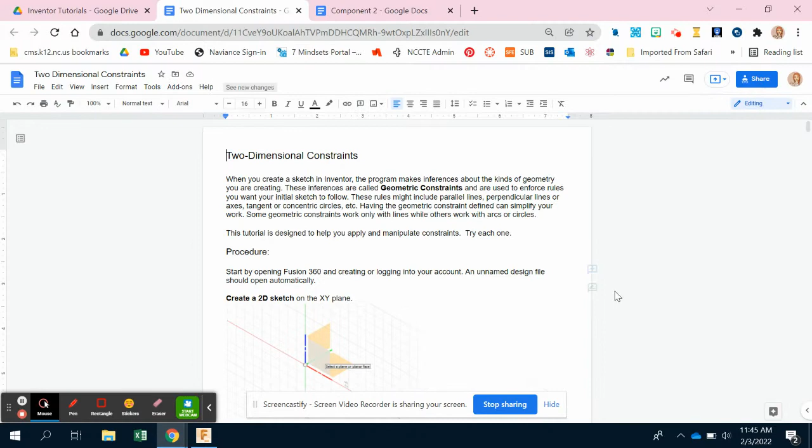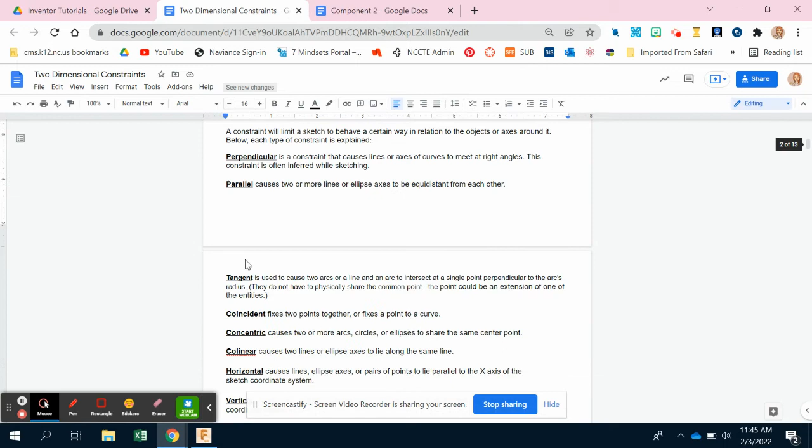If you open up the tutorial, it'll look something like this. I've gone through and added screenshots of each of the components that's important, what your constraints and everything look like. I also would encourage you to read through this section here, where it has each of the different types of constraints that we'll be working with today and what they do. However, in the software, I'll show you in a bit, it does define them at each step, so if you want to read it that way, you can as well. But you definitely need to be familiar with the different types of constraints in order for any of this to make sense.

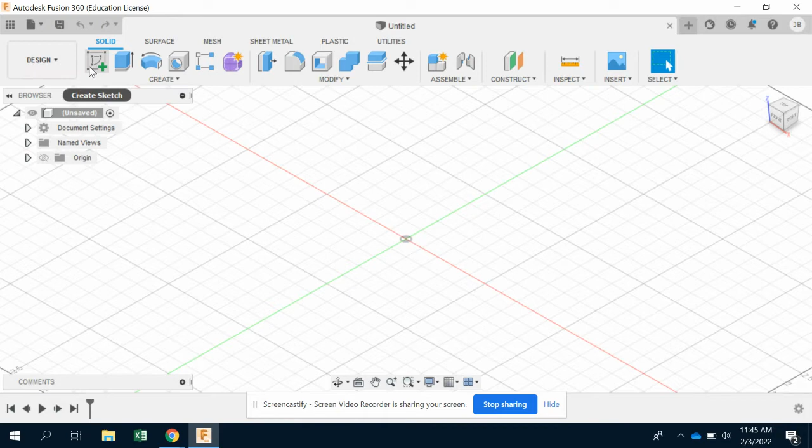So to start out, we are going to create a sketch by using this button here. You'll see that if you hover over it long enough, it'll give you a definition and then some images to go along with it. So we'll click here, and then we want to select this work plane here that has your X and your Y axis like this. It should rotate it to where you're looking perpendicular just at that profile.

Over here, you've got some sketch palette options where we can show some different features of our sketch. Up here along the top, we have some constraints that will modify your sketch or restrict it to behave a certain way. Over here, we've got some things that will modify it in different aspects other than just restricting it, and then how we create things over here.

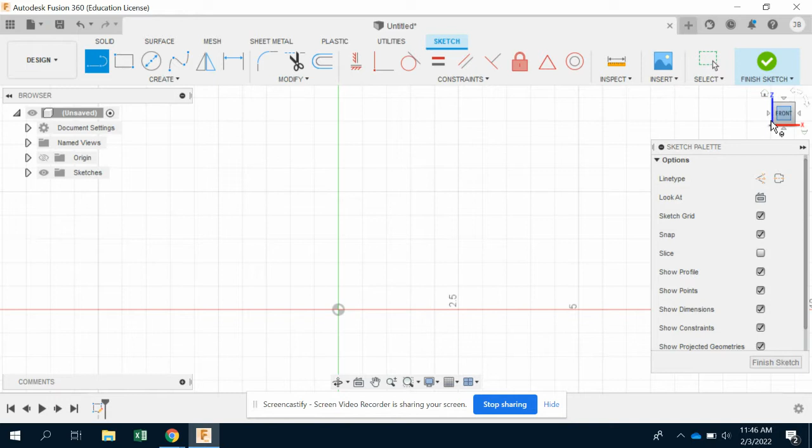So we're going to start out with just creating a line. If you scroll with your mouse, you can zoom in and out. And then if you press the scroll of your mouse, it'll pan you across your screen without having to use this navigation cube over here. So I'm just going to draw a four-sided closed figure polygon shape like this. Yours might look a little different than mine, and I know that mine definitely looks a little different than the example that we're given here.

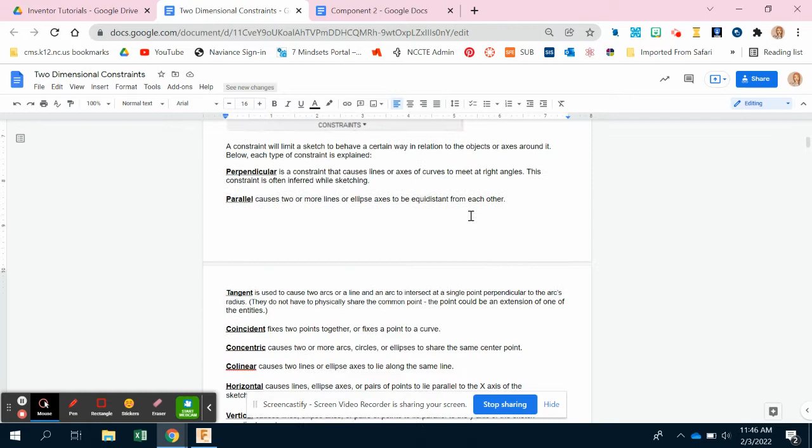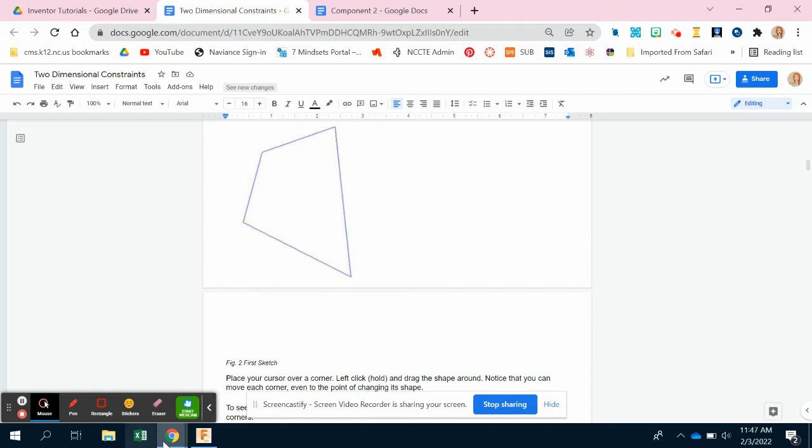So it looks different, doesn't really matter. But in a program like Fusion, you're just going to start with a rough sketch, and then we'll go in and refine it by using our constraints. Whereas a program like AutoCAD, you want to make sure that you're drawing it correctly from step one. So just get a rough sketch like this, and then press escape to get out of that command.

If you click on the corners and the lines, you'll see these little symbols that pop up. This just means that there are constraints present here. This is a concentric or coincident constraint, which means that they share the same endpoints.

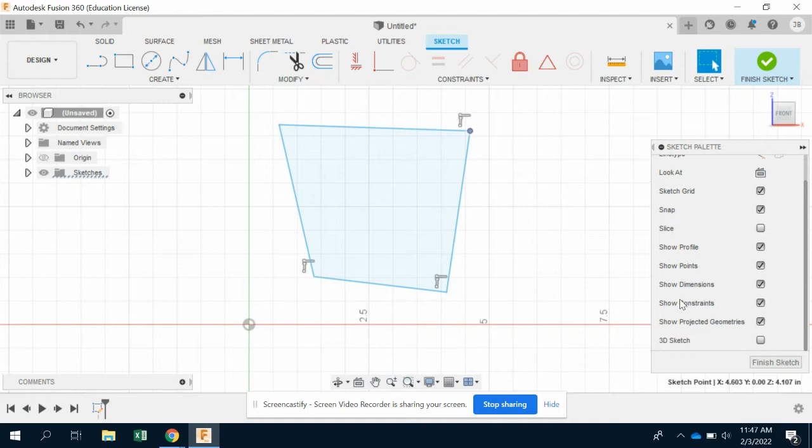If you can't see these, then look over here in your sketch palette window. You'll see show constraints, you can uncheck that or check it. To see them, you'll have to make sure you check it and then go around and click on all of your corners. You want to make sure that there are no other constraints present other than that coincident constraint. If you see anything else there, then make sure that you delete it.

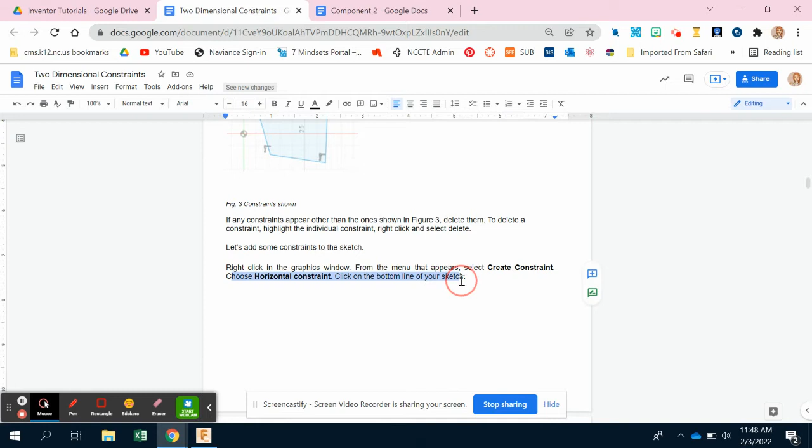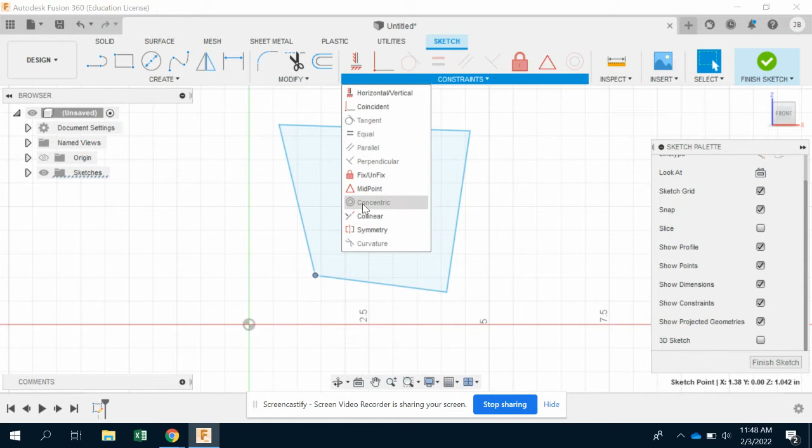So the first thing that we're going to do, if we look back at our tutorial, is we want to add a horizontal constraint to the bottom line of your sketch. So unlike a program like AutoCAD, where you pick a line and then you make it do different things, this is the opposite - you want to pick the constraint that you want to apply. So what kind of restriction do you want on your sketch, and then click the thing you want it to apply to. So if you click this drop down box here, you will see that all of your different types of constraints are popping up. It has grayed out any of them that we can't use at the moment. So you want to find the horizontal or vertical one, select that, and we want to make this bottom line horizontal like that.

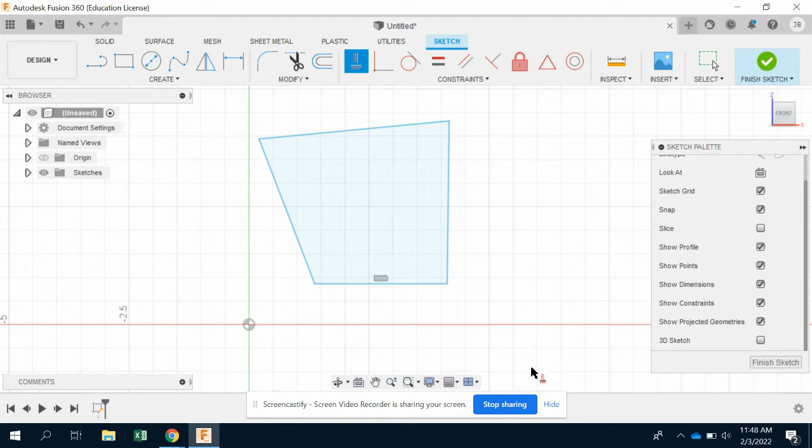Then looking back, our next thing is to add a fixed constraint to the bottom corner. Your fixed constraint looks like this. Again, you can hover and it'll tell you what that constraint does. And so we want to fix this corner here.

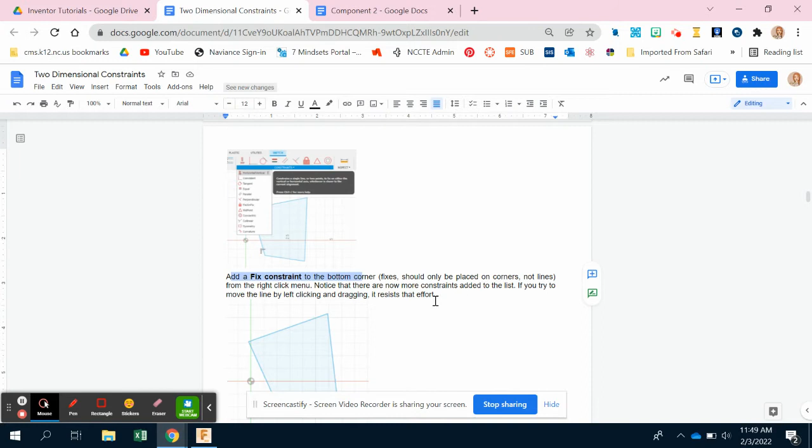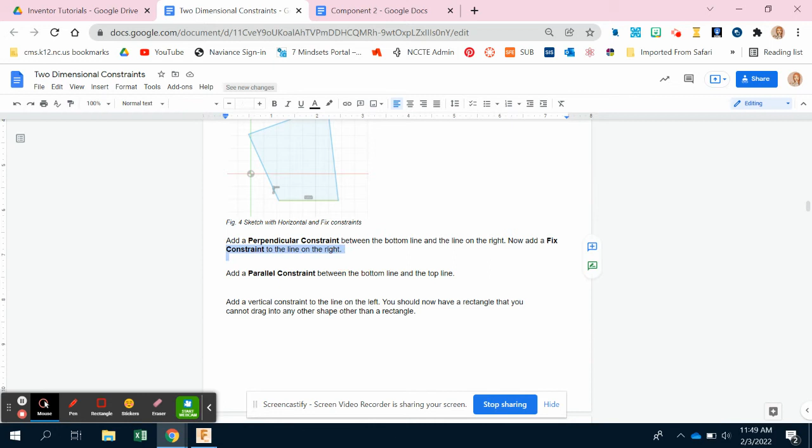Scrolling through, we're going to add a perpendicular constraint between the bottom line and the line on the right, then a fixed constraint on the line on the right. So I want a perpendicular between here and here, and then I want a fixed constraint on here.

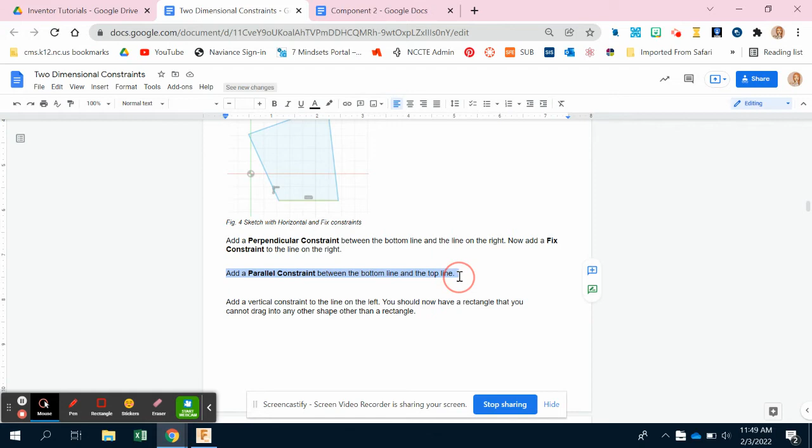Then I want to add a parallel constraint between the bottom and the top line, and a vertical constraint on the line to the left. So a parallel looks like this, top and bottom, and then a vertical for here.

The next thing we're going to do is add some dimensions. If you look here, we've got the dimension command, or you can press D on your keyboard. So we'll press D, select this bottom line, drag it out, click and release again.

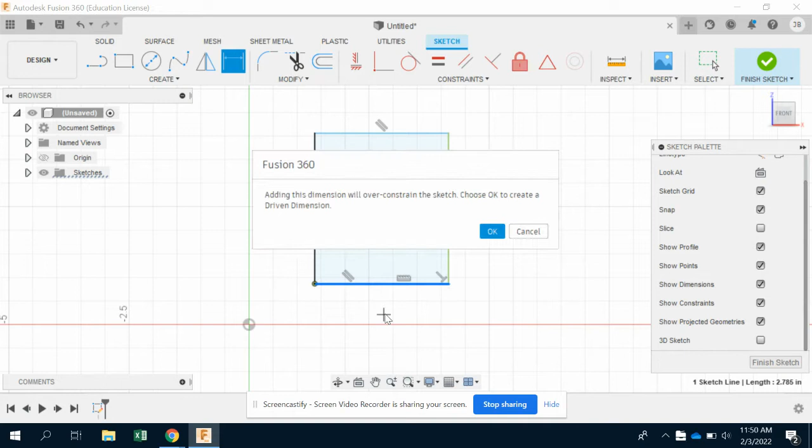This is not good. If you get this window here, it says that I've over constrained my sketch, which is probably because I locked this earlier. So just be careful with what things you put and where you put them.

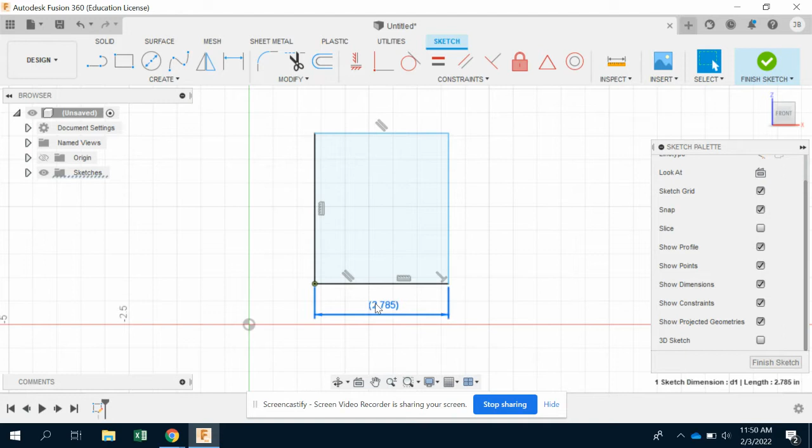So I'm going to click this line here and redraw it. I tried to delete my lock command, my fixed constraint, but it wasn't deleted. So now let's see if I can dimension this. There we go.

So now it works. We want to make this one 4, and then we're going to dimension over here as well, and we want that one to be 3. And then once you've done that, you've finished this sketch. So you can see we just drew a rough sketch, added some constraints, and then we finished.

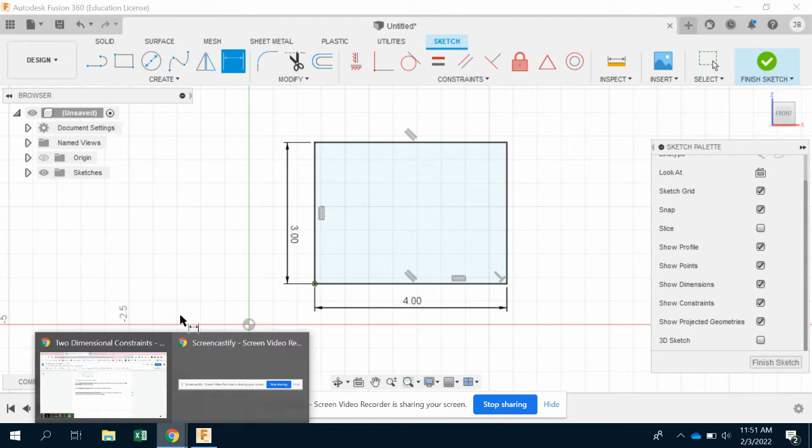So for the next part, we're going to draw an additional sketch. So we scroll down through here. You'll see all of the things that I just showed you. Now we're down here to our next sketch.

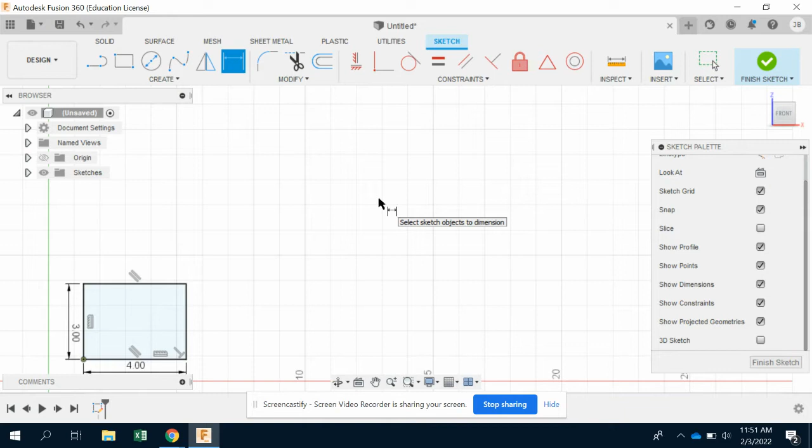We want to draw this shape. You can do this however you want to. You can finish the sketch and create a new one, or you can just zoom out and draw it over here. Whichever, I don't have a preference for you for this one specifically. As we go through other ones down the road, it will matter, but for right now, it doesn't really matter.

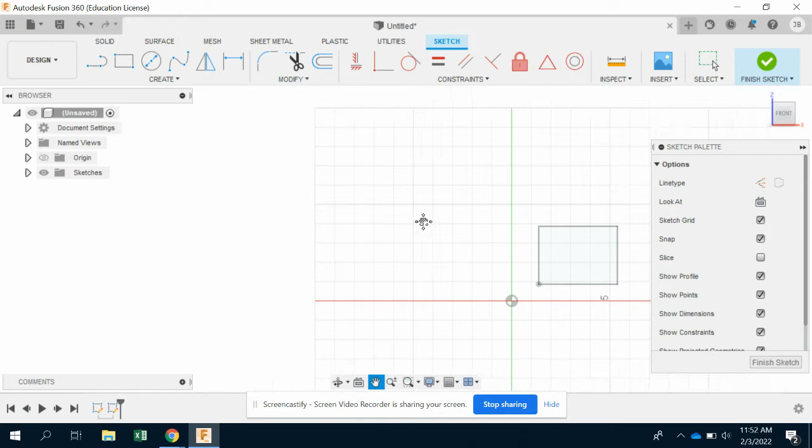For good practice, I'm just going to finish the sketch, and then I'll create another sketch on the same surface. That way they're isolated from one another. So then I'm going to make that oval-ish diamond shape. You can draw wherever you want to. I'll just draw over here.

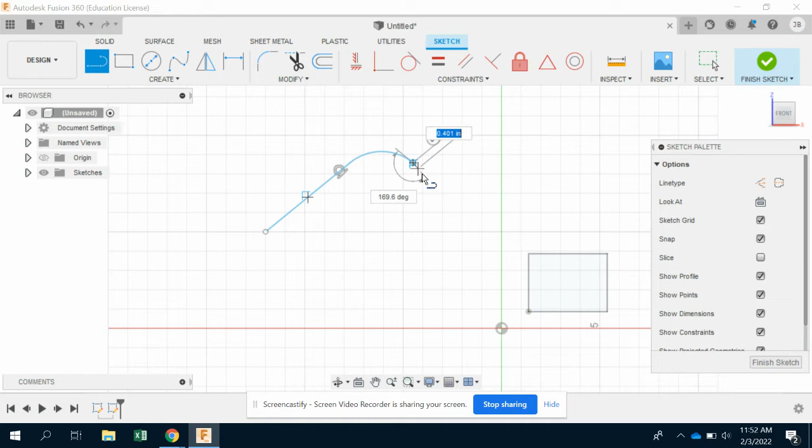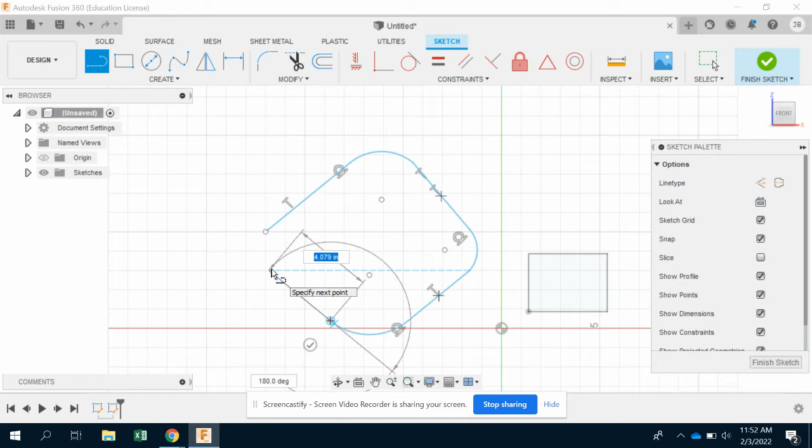So to create this object, I'm going to use the line command. I'm going to click and release, drag my mouse up this direction, no specific spot, click and release again. And I'm going to click, hold, and drag my mouse to create an arc and release. Then I will click and release again, click, hold, and drag to make that arc and release. Click and release again, click, hold, and drag back to our starting point like that.

I was doing something funky over here, so if we have any issues later, that is why. For looking at the directions, it says that we want to show all of our constraints and delete anything except for the tangent constraints.

Coming back here, I'm going to delete these like that. And then you want to make sure you have a tangent constraint on each side of the arc, one on both sides. So I'm going to add a tangent constraint, selecting the arc and the straight line, the arc and the straight line, and then the arc and the straight line. And so now I have a tangent constraint on each side of the arc.

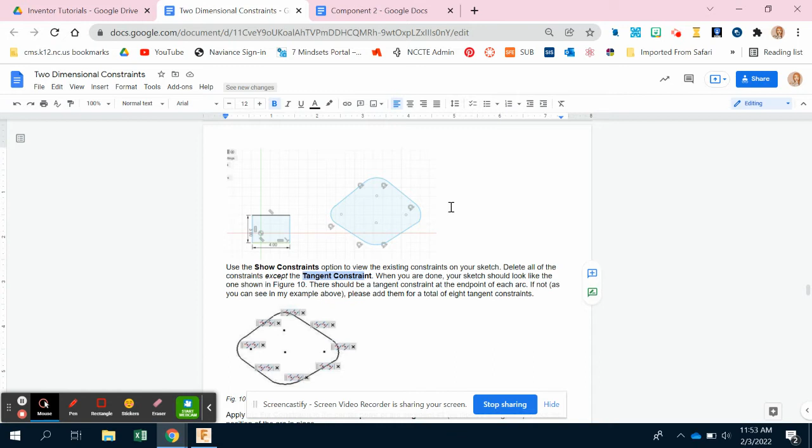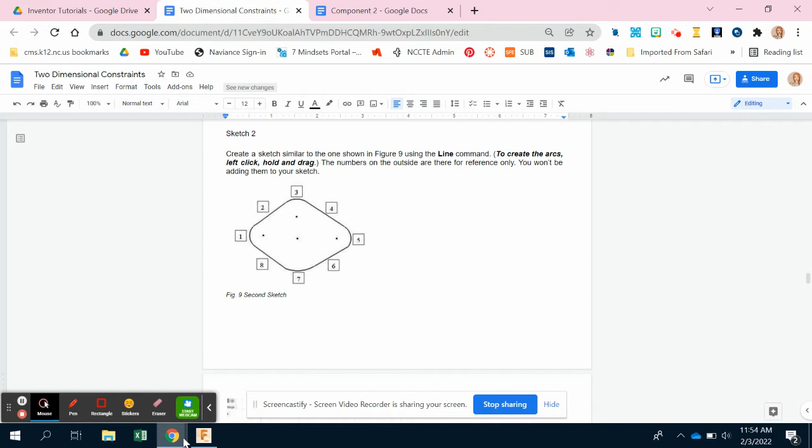Continuing on, we're going to add a fixed constraint to the center point of segment 1. If you look up here, you'll see that they are labeled. So this arc here is segment 1, and we want a fixed constraint on the center point of that, which is right here. These 4 points here are the center points of each of the arcs.

So this one goes here, this one with this, and then this one goes with this one. This would be segment 1, and we want to fix this. So clicking the fix constraint, make sure you're selecting the center point, and the center point turns green, not the arc itself. That'll create some major issues going forward if you don't just lock the center point in place.

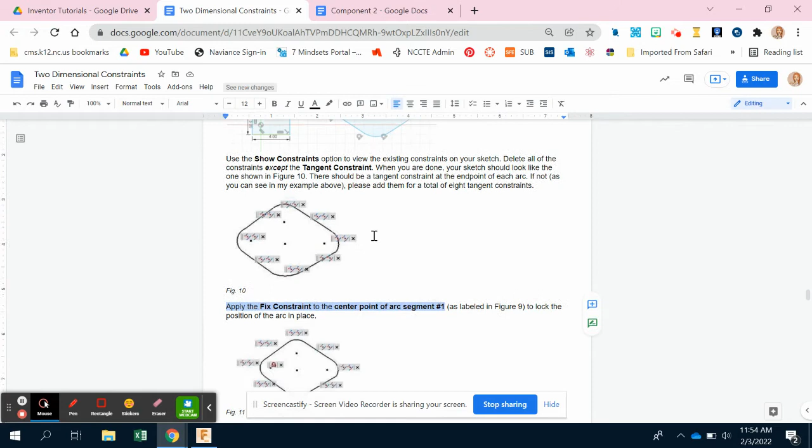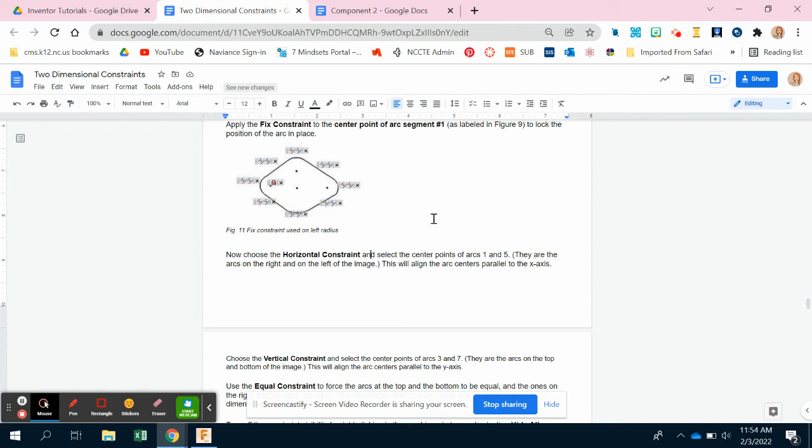So going back, we are going to add a horizontal constraint between this point, and then a vertical constraint between this point and this point. And then we'll add equal constraints to the top and bottom arc, and then another equal constraint to the left and the right. So let's make this and this horizontal, and then this top one and this bottom one vertical.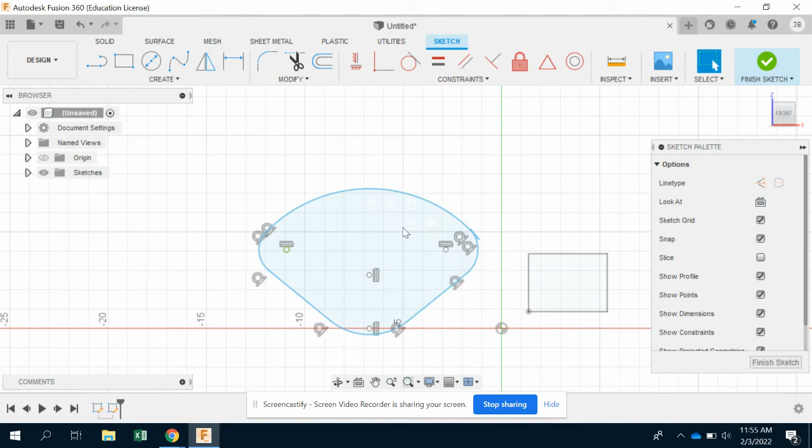And now I've already got some issues, so let's see if I can fix that by dragging this out some. So they twisted up on themselves. So I'm going to try to fix it as best I can.

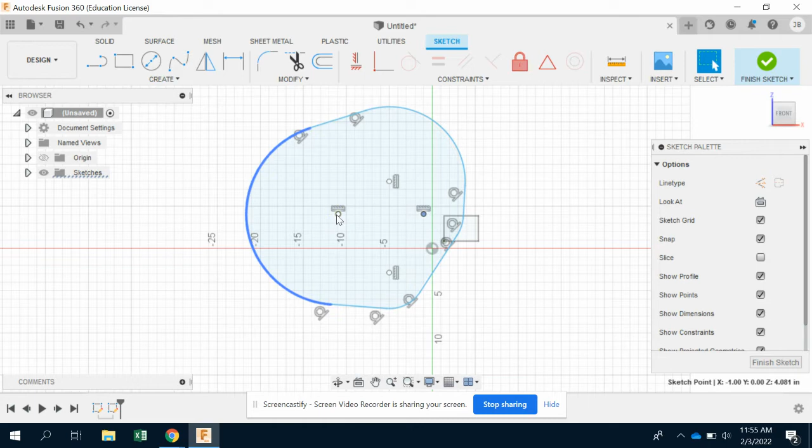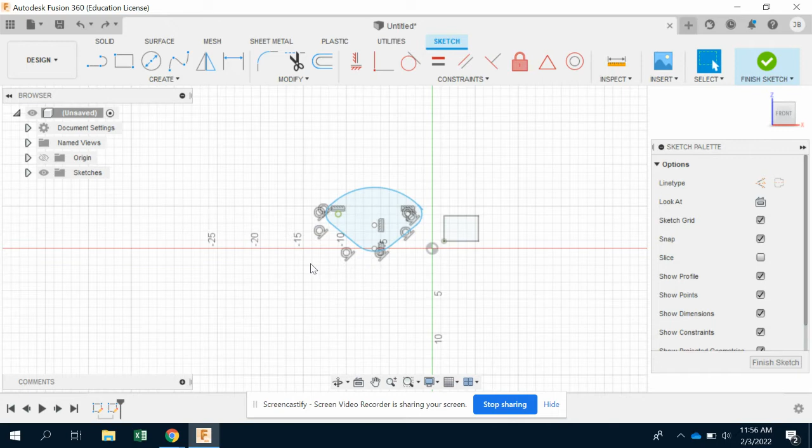So if that happens to you, it just twisted up on itself, so be mindful of that. It may help if you adjust it so they're already a little more vertical, then add the constraint, and hopefully this time it won't twist up. Try it again, if you mess it up it's okay, just undo it. There, that fixed it.

So if yours twists up, just undo it. Try to move it to where it's supposed to be first, and then constrain it. Little things like that happen all the time, and that's okay.

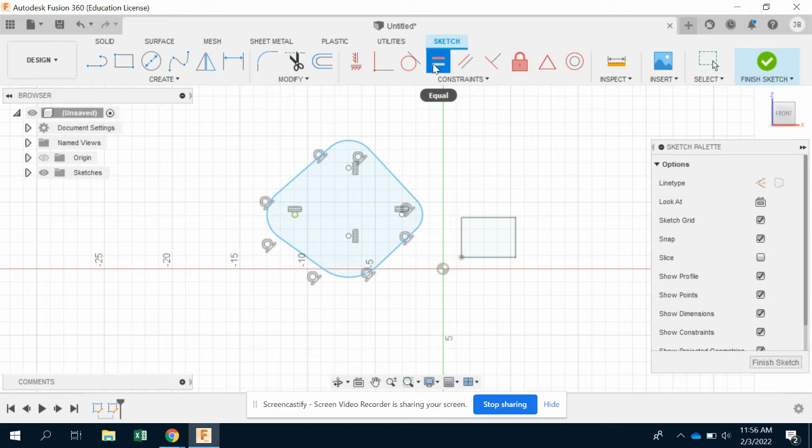All right, so next we're going to add those equal constraints. We want the top and bottom arc to be equal, and the right and left to be equal. Then we're going to add our dimensions. So let's create a dimension - from this center point to this point here should be 2.

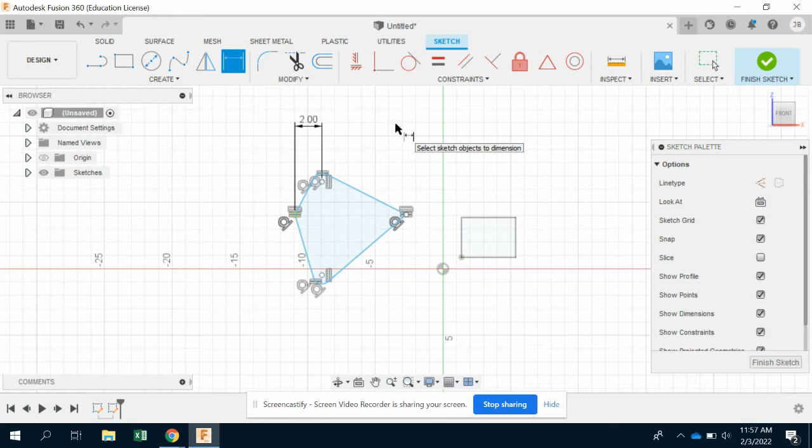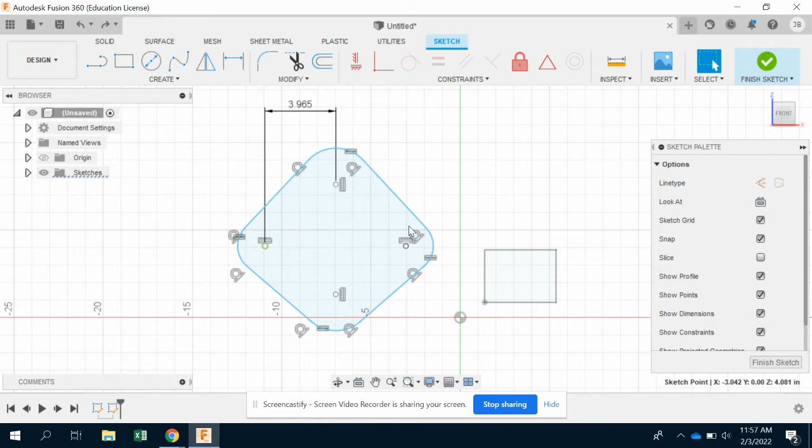Okay, I've already got some issues, and that is okay. I'll undo that, and just leave this here for now. Then from here to here, we need a dimension as well.

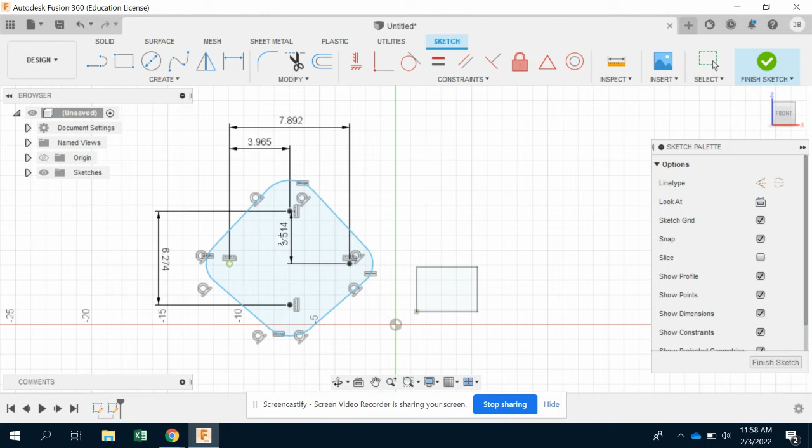And I'll go back in and add those values in a bit. So we'll go from here to here, and then from here to here as well. I'm going to pull this on the other side just so it doesn't get confused with this one. So this 3.5 - the vertical between the top and the left and right one should be 0.25.

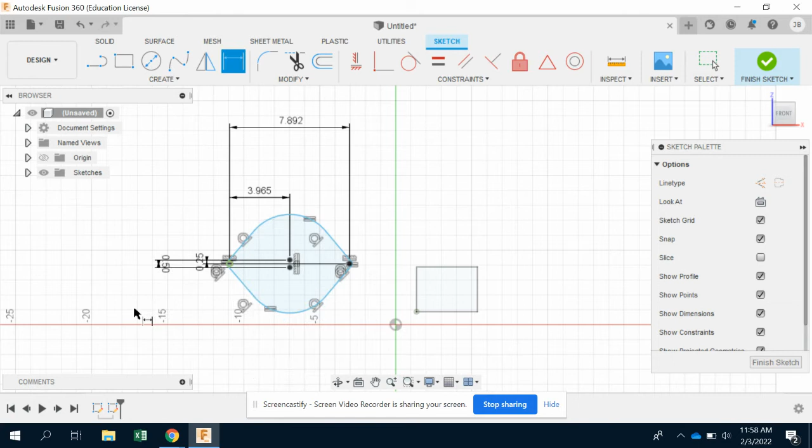Hopefully it doesn't do anything crazy. And then this one should be 0.5. And then this 3.9 should be 2. And then this 7 should be 4.

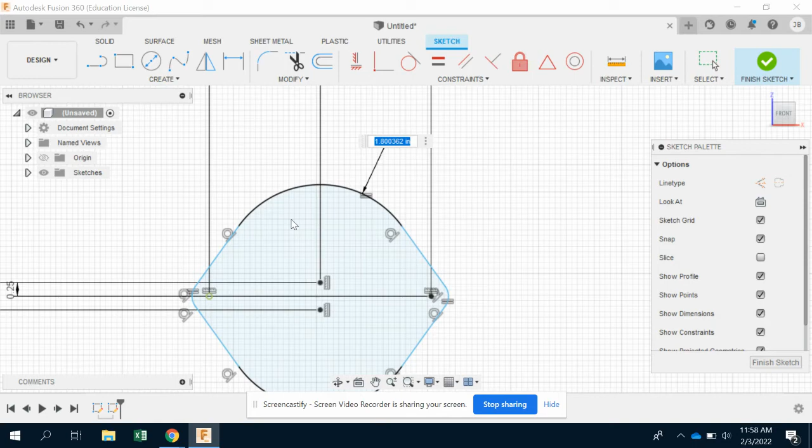And then if we zoom in, we're going to add a dimension on the arc here. Looking back at my dimensions, the top and bottom one should be 2, and the left and right should be 1. So I'm going to make this 2, and then make these 1.

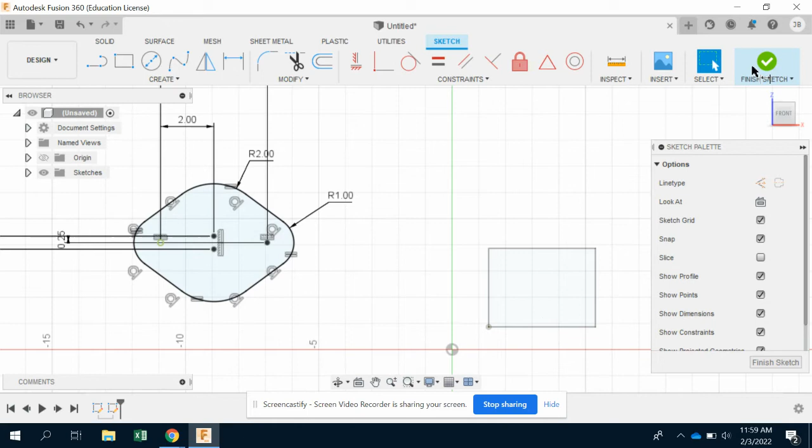So try to just be patient with yours as you're working through it. If you make a mistake, just undo it and try again. If it's starting to look a little distorted, try to hold tight and keep moving forward. As you adjust it, hopefully it'll take the shape it's supposed to. And if it doesn't, delete it and try again, just be a little more careful next time. So again, keeping good practice, I'm going to finish this sketch. That'll finish this first one.

And then we're going to come over and create this shape. So I will start a new sketch here. You can draw wherever you want to. I'm going to just start here on the bottom, just guessing.

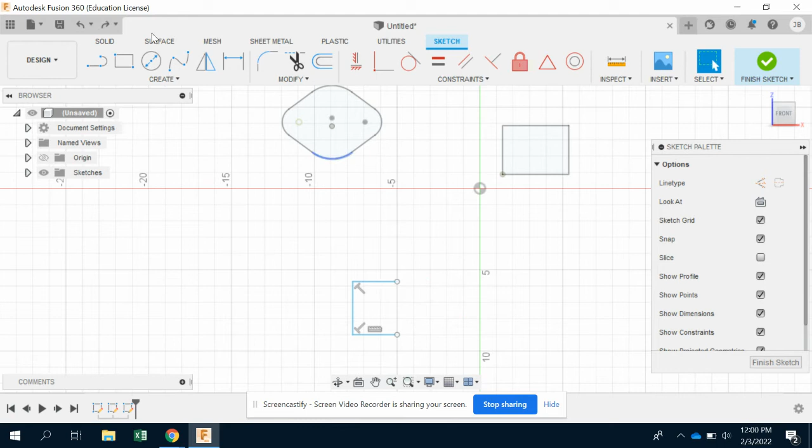Oh, that's going the wrong direction, so I'm just going to undo it. Still going the wrong direction, which is fine. So I'll just come back, work my way back around.

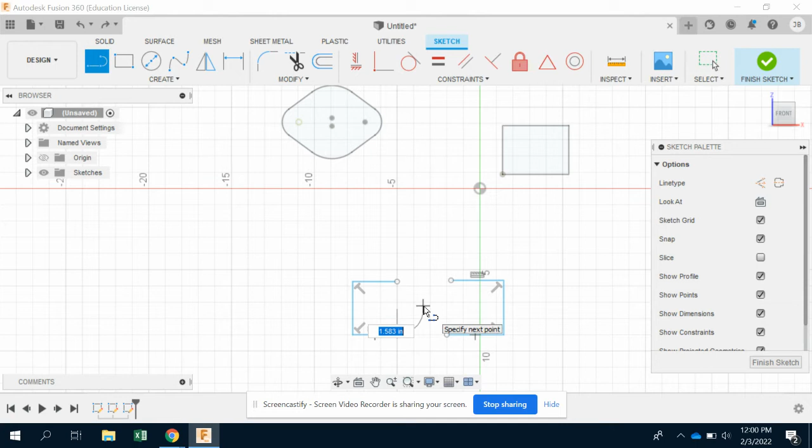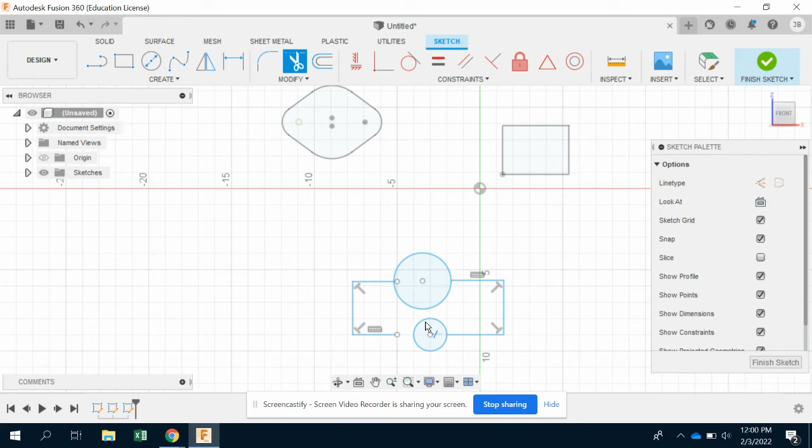Okay, well my typical arc method isn't working that great, so instead I'm just going to draw a circle. And I'll draw another circle here, like that. And then here's a neat little button we can trim. So you can trim the bottom of the circle off, and then you can trim the other side of this line off, just to make it work.

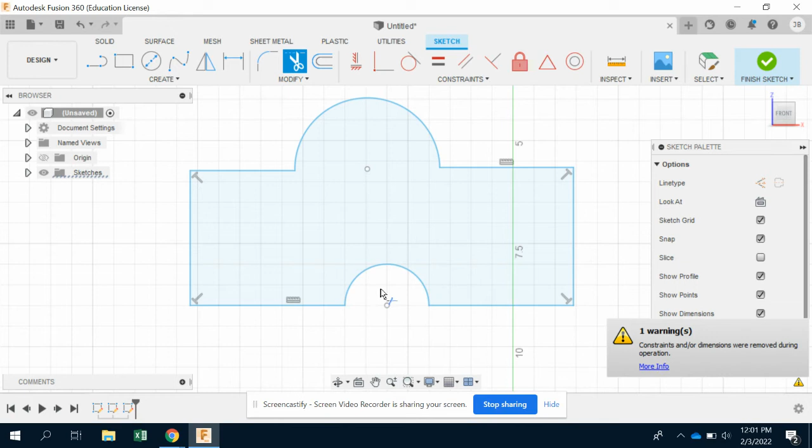We also have, hopefully, an extend button. So here's an extend, and I can extend this line to this circle here, and then I can trim it off just like I did up above, like that. And so now it looks more like the shape that it was supposed to.

Now I'm going to add some constraints. So I want the top arc and the bottom arc to be the same. I want their center points to be vertically aligned. I want this right and this left line to be equal to one another. I want this bottom line and this top line to be equal, and then the top right and the top left to be equal as well.

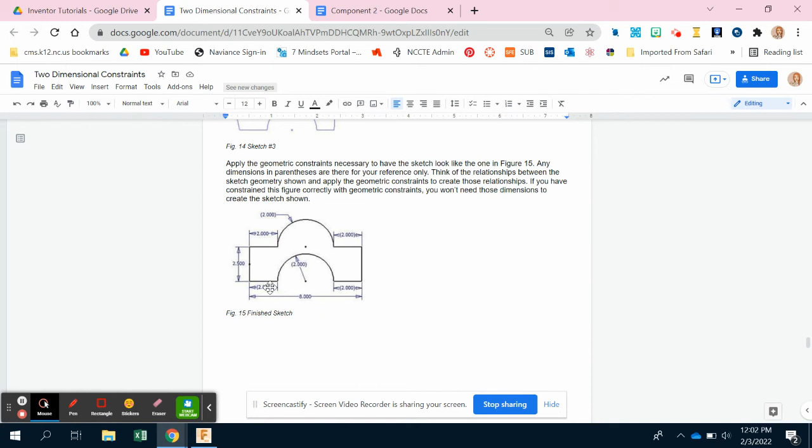So once you get those equal constraints added in there, you just need a couple dimensions. Looking here, you can see that everything in parentheses means that's a driven or understood dimension, which means they made this 2 and then made all of these other things equal to that 2, including the arc. So I'm going to go back in and add an equal constraint between this and this.

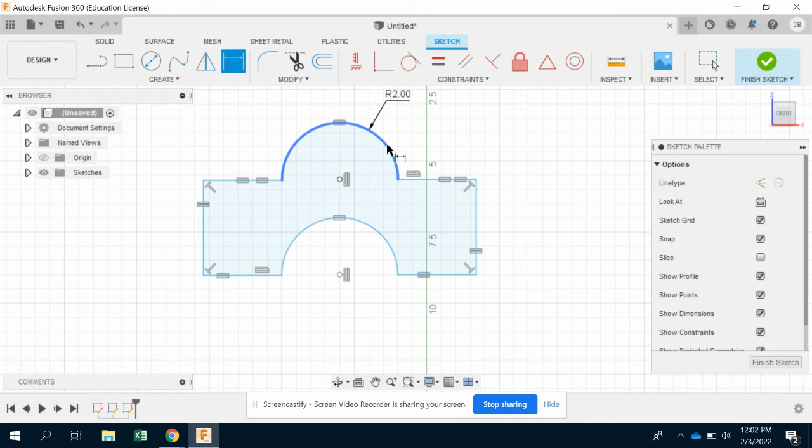Okay, so it doesn't let me do that on this one specifically in this program. So I'll just add a dimension here and here. I need to make this arc 2. Because of the equal constraint, it'll make this one 2 as well. I need this line to be 2. Because of the equal constraint, it'll make this, this, this, and this 2 as well. I need the overall width of the shape to be 8.

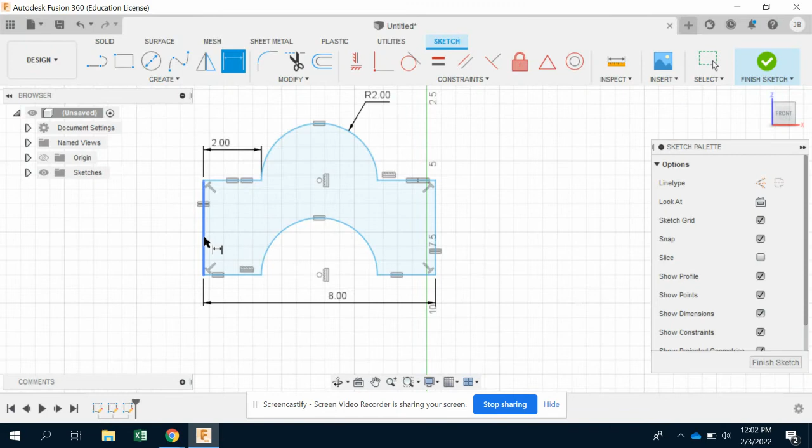And then the height is 2.5. So 2.5 for this dimension. And then that completes this shape. So again, in good practice, I'll finish my sketch. Now I have 2 of them here. I'll start another sketch, which brings us to sketch 4, which is this shape here.

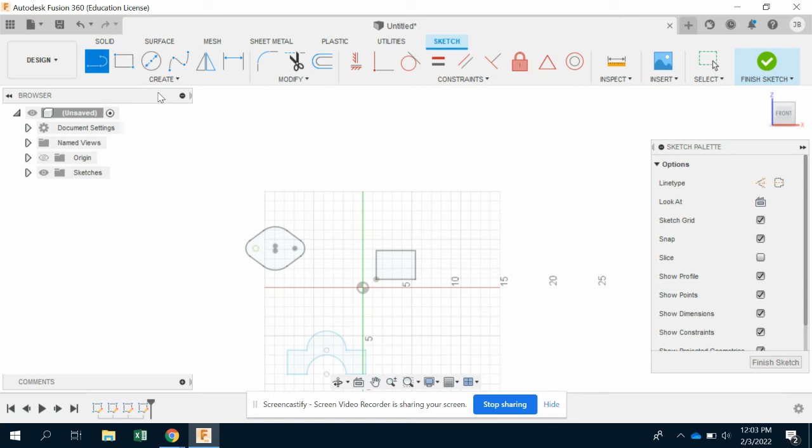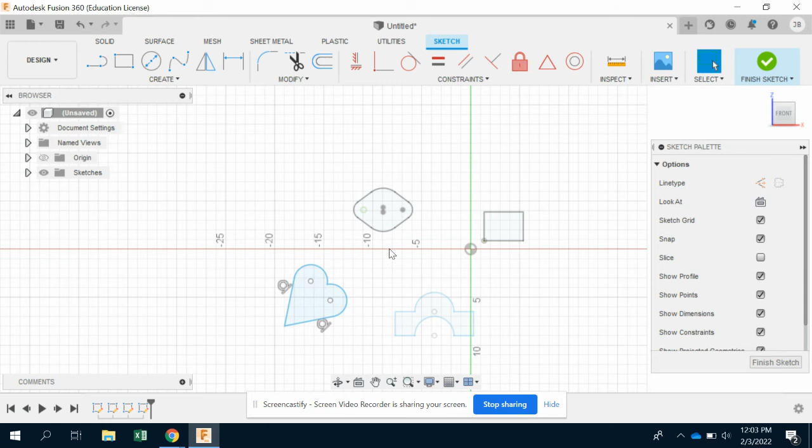Again, I'm just going to, yes for now and make a heart shape. So I'm going to draw here and here. Click, hold, drag. And that gave us a spline instead. Let's try this way, click, hold, drag, and then there we go. So I've got kind of a heart shape here. So I want this line to be vertical and that one to be horizontal.

And then I want a coincident constraint between the center of this arc and this line, hopefully, maybe not, a collinear, which that's not working either. So we're going to come back to that one.

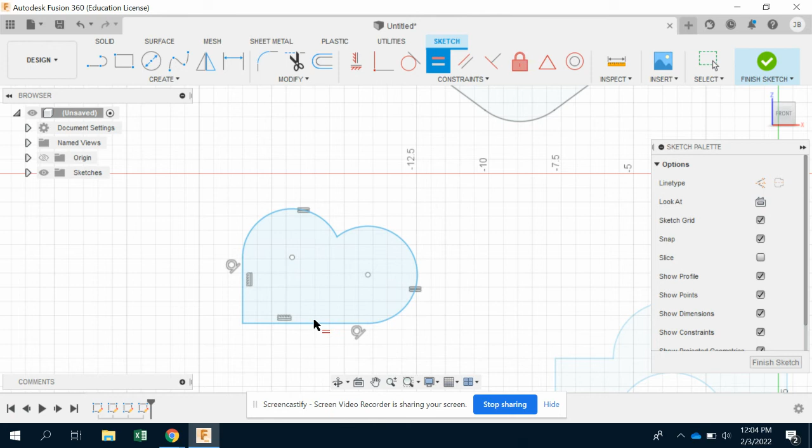I'll make this arc and this arc equal to one another. I want this line and this line to be equal to one another. And then I want the radius of the arc to be 2. Like that. And then because of where the center points are, that's why it looks distorted.

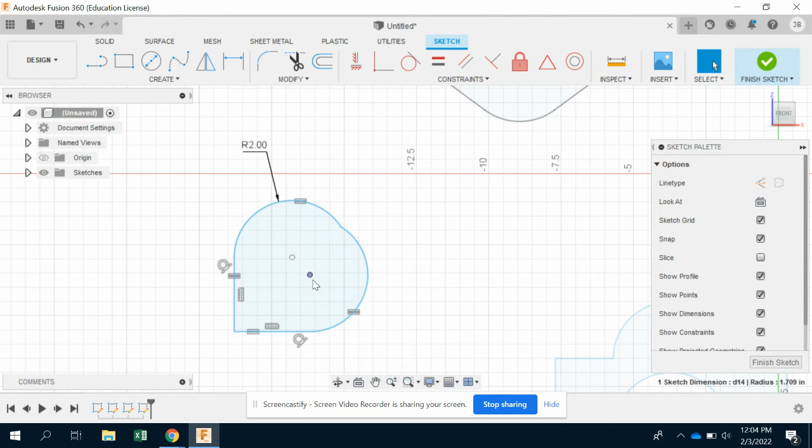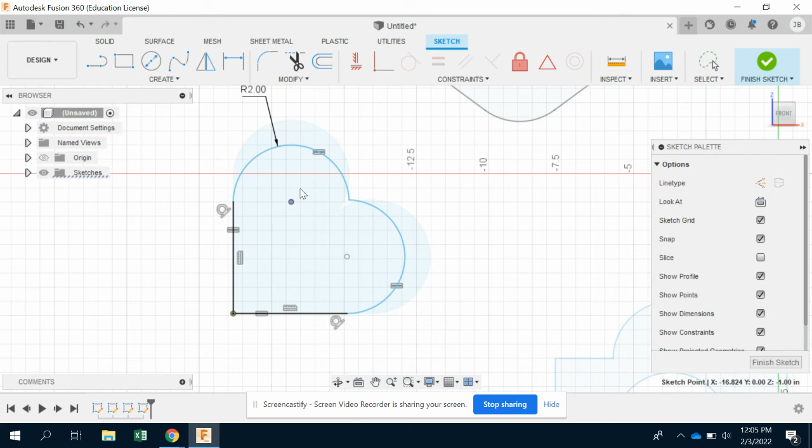I'm going to lock this corner, or fix this corner, so I can move the other things around. And this center point needs to come down here, but it's looking like I can't do that in this program. So for now, just leave this one here like that.

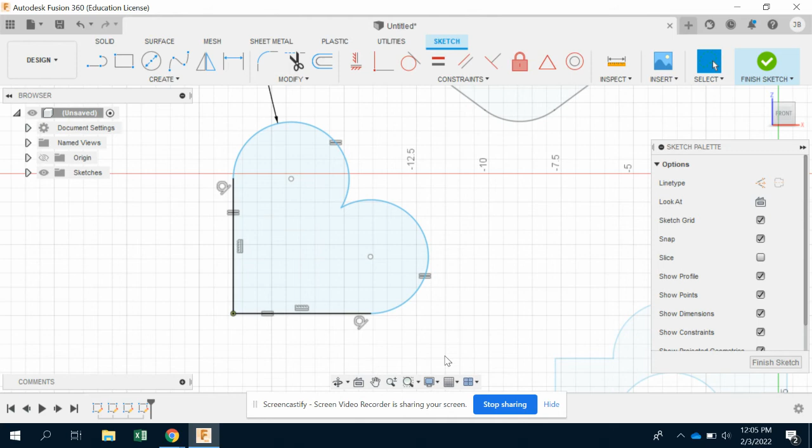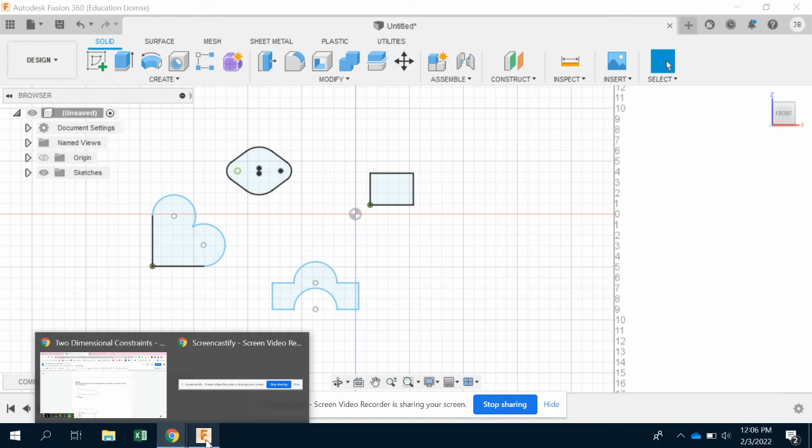And then that leaves us here with this shape here. So again, I'm just going to, yes. For good practice, finish my sketch. I know our heart doesn't look exactly the way it's supposed to, but we'll come back to that. I think I forgot this dimension too. So while I'm here, I'll show you how to edit a sketch.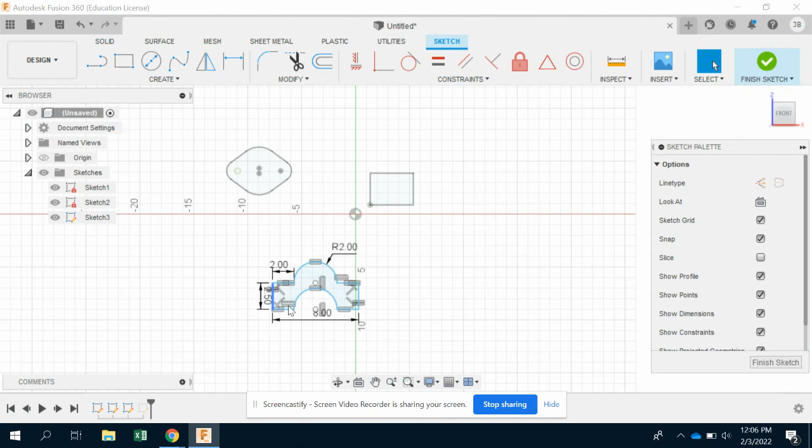So if you click this arrow here, you can see our other sketches here. You'll see this one has a lock and this one has a lock, which means the shape was fixed in place, which means these bottom two were not. So I can double click to edit, and to make this one fixed in place, you can just lock one of the corners down and then finish that sketch and it will update it.

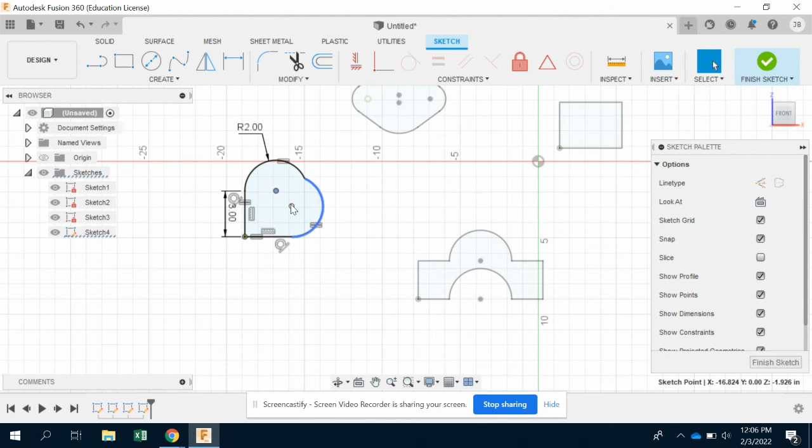And then this one here, we're missing a dimension on one of the lines. It doesn't matter which one because they have an equal constraint. That needs to be 3. And then just because of the center points, it's not letting me fix it. So we'll come back to that later, and then you can finish your sketch.

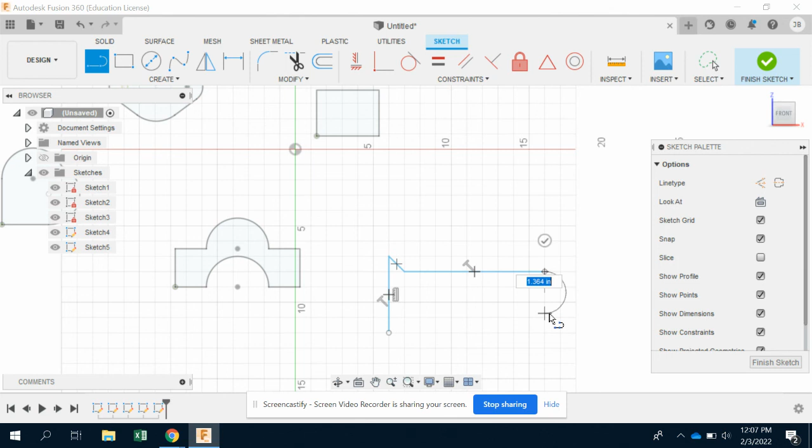And then our last one, draw one more final sketch. Again, we're just going to estimate with the shape. They don't have to be perfect when you start out, so looking kind of like a rocket. And then you want to add these dimensions to it to make it take this shape. I would recommend adding some equal constraints there and there if you can.

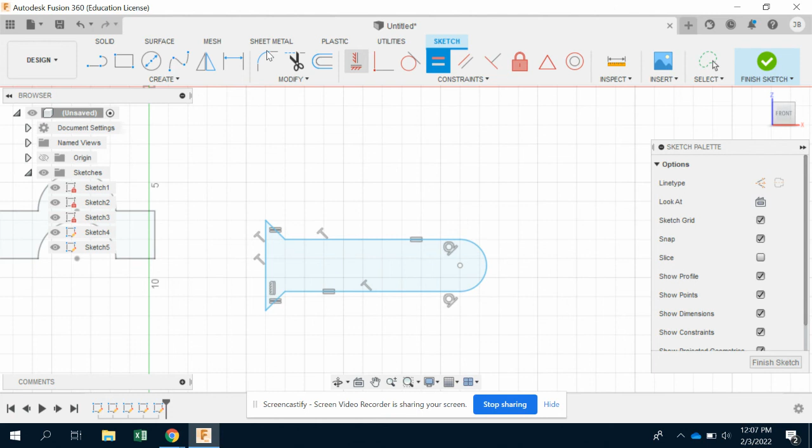And then we want this line to be 5. We want from this line to this center to be 2.5, which is over constrained probably because of my equal constraints, which is fine. And then we want the length of this to be 1.

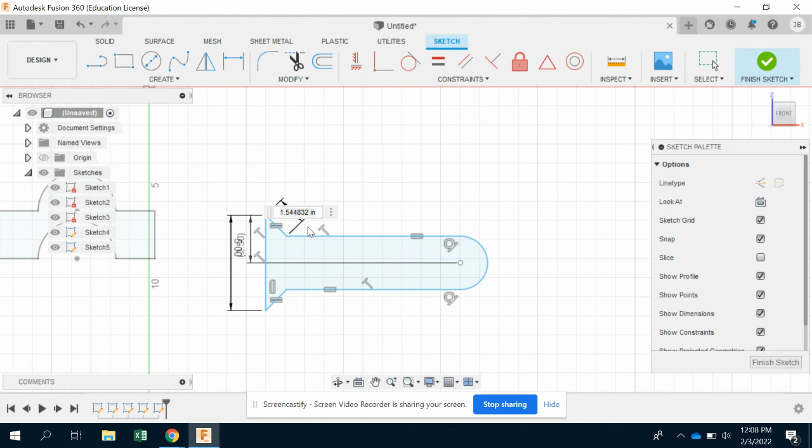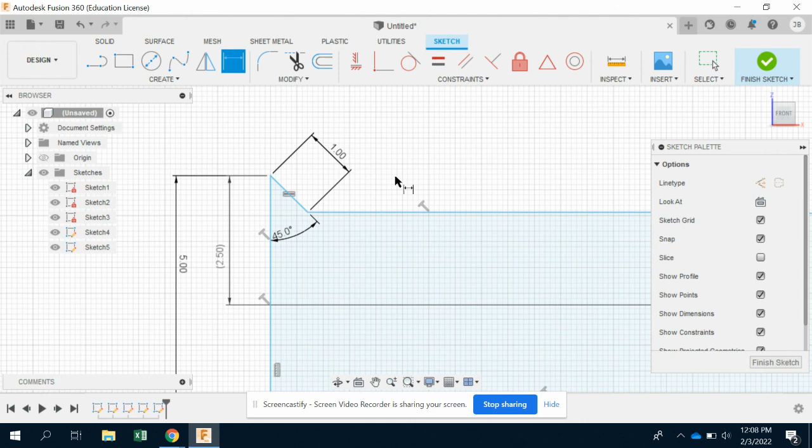And then we want the angle between these two lines to be 45. I'm going to zoom in so we can see a little better, from here to here to be 45. And since the bottom and the top have an equal constraint on them, they should be the same. Like, it should adjust itself. I'm going to double check, and it did, which is why it over constrained it.

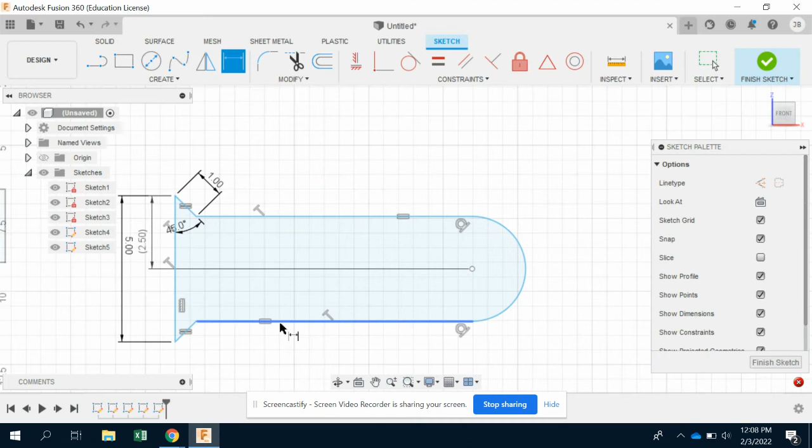And so now we're just missing the 9 here and the 1.79, but you'll see that that's in parentheses, which should mean that it's a driven constraint and is assumed. So from here to here is 9. And then you can just check by adding a dimension here. You can see that number is already there, because it's assumed that it couldn't be anything else.

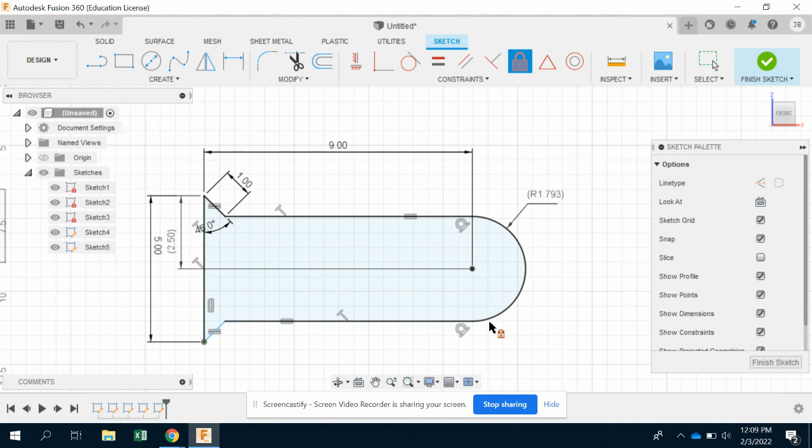And then to lock it in place, we'll add that fixed constraint down here in a corner, and you'll see it changes everything to black, which locks it in place. So again, finish that sketch, and you can see all of them here at one time. If you ever need to modify a sketch, click this arrow and you can go in and edit them like that. I'm missing something here.

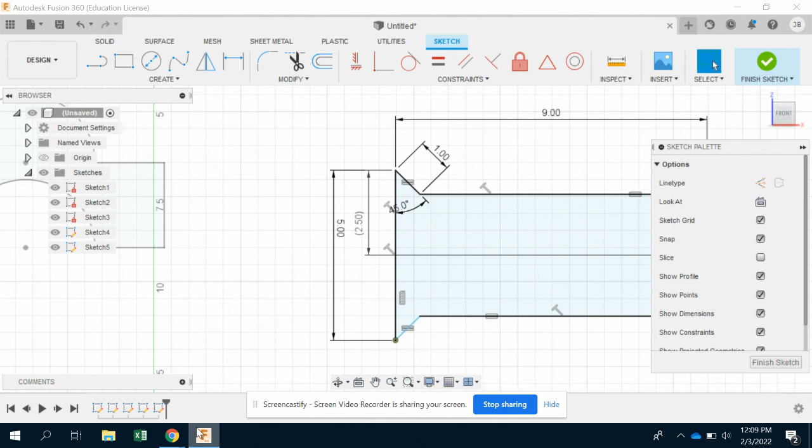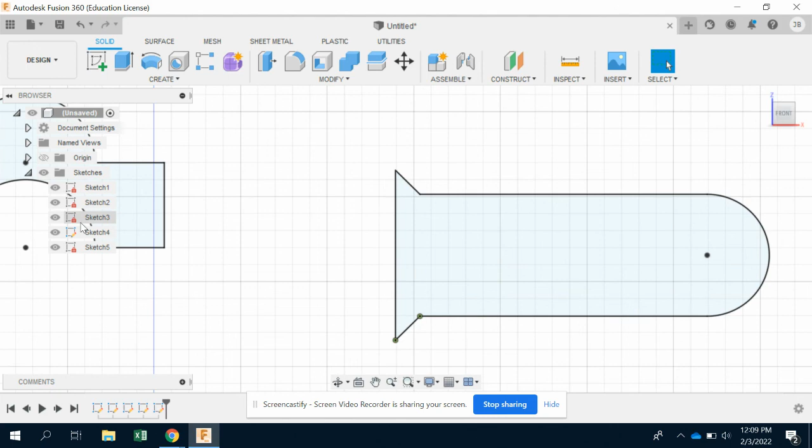So I'll check my dimensions. We've locked that one in place, and now you can see it's locked. The only one that was an issue was the arc one, and we'll come back to that later.

So that finishes it. So to turn it in, we're going to click up here under File, and then we're going to click Share and choose a public link, and then you'll get the link there. Copy and paste that and place it into Canvas for your submission.